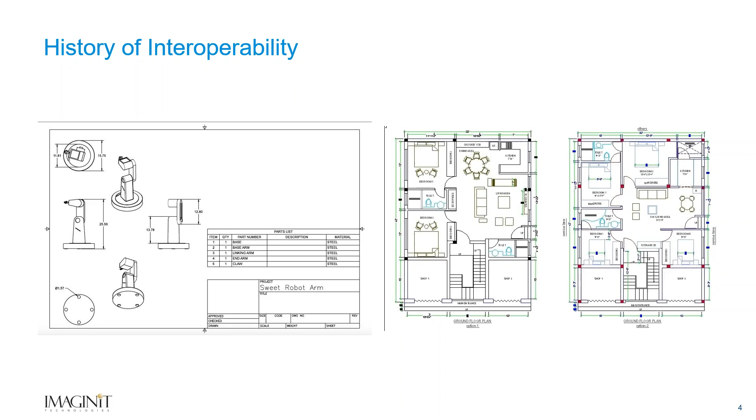So on my end, we're looking at the left side there where we've got Autodesk Inventor. That's really the tool we're talking about today when it comes to this, where we can do a true digital twin of a mechanical device, down to actuators, down to range of motion, everything about it. This could include all auxiliary tooling for that - it could include whether it's a mold or a die cast component that we want to put in there. We need to capture that, whatever it may be. So Inventor captures it right down to a very fine level - we're talking thousandths, down to several thousandths in precision. We're talking every little screw, nut, bolt, everything that goes in there, and we can capture it, create bills of material, create documentation for that.

The other side, looking over at the right, is where Brian comes in. It's a little different on that side, right Brian? Yeah, definitely. When you take a look at a Revit-based environment, and that's what you're looking at right there - go ahead and let's leave it on Caleb's screen for just a minute - when we take a look at the Revit-based environment of it, Revit is really looking at parametric design. What is your design intent? Although in manufacturing we can see all the actuators, all the bolts, that's really not what's important to us. The range of motion is important, the area of operations, the area required for maintenance of that piece of equipment.

Other things that are also important is a graphic representation of what that product is and any services we need to provide to it. Is there a structural load requirement for it? Is there power? Is there data? Do we have to provide coolant for it? Those types of things become important in a Revit parametric environment.

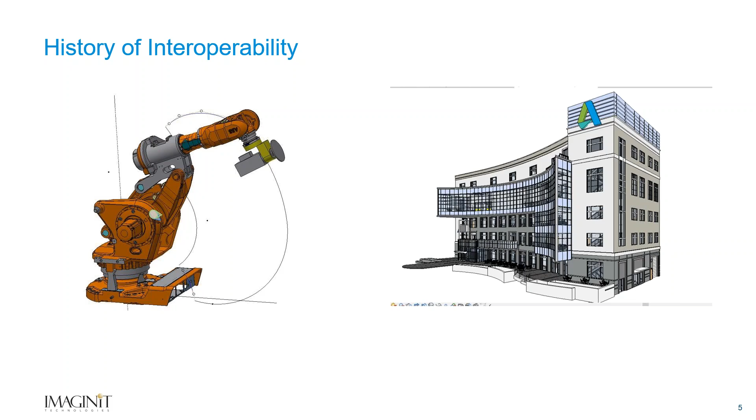And again, in the old days it was easy. We use AutoCAD. Well, then what happened is once they moved to these specialized kernels, for a while there, this was really difficult.

Autodesk has kind of begun to accelerate this, and we've seen this back in Inventor 2016. I could, for example, if I wanted to work in Brian's building to begin a layout, I could bring in a Revit file, import it and begin working to it. Then I could export to a Revit family. And that was really all we could do for a while - we could either import the file and then export it.

Then they added AnyCAD, which had been around. It came out in 2020. And with 2021, it was AnyCAD for Revit, where I could use the Revit file linked to my file. I didn't have to import it anymore like I did before. That meant if the Revit file changed, my file changed. So I still had to have the Revit file locally, but it was possible.

2022, I could export Inventor files as a Revit file. So we'll see that in a little bit where I go through and export it out as a Revit file. So it comes in, I work on it, and then I can send it back out. And in 2023...

2023 is probably the beginning of the new way of doing things. That's when Autodesk really first introduced the capability to generate these families - Revit calls them families, AutoCAD calls them blocks - being able to transfer data and information back and forth from Inventor to Revit type platform.

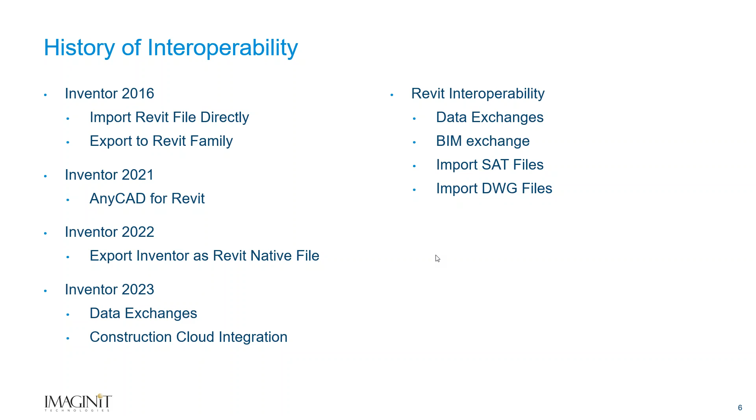Yep, and we'll see some of that, like I said, in just a moment here, where we transfer this data back and forth in a variety of ways. Before we start talking a lot about just transferring that data, there's a couple things I want to make sure we're covering here. One is this one.

It's the idea of a BIM catalog workflow. We are going to generate components inside of Inventor, and we can push them over to Revit. But a lot of times with a catalog, it's a little different. Revit uses, we mentioned families a couple of times. I'll have some examples here. But Brian, could you walk through this idea of this workflow? I know this doesn't even need to have Inventor. Inventor could play a part, but it does not have to play a part for a catalog workflow.

To me, a catalog workflow is when, as an architect, I can go to your product website and see a catalog of parts and pieces that are available with different sizes and different options. That type of workflow lends itself to family creation, being able to provide families out there so that designers can take that information and design within the envelope of the constraints of your product line. I'm not going to go outside of the options of what you're able to manufacture or how that product was intended to be used. A lot of the times I'll use a window as an example.

We have certain widths, certain heights, certain depths, certain amount of square footage of light that they provide, of glass requirements. All of that can be natively built into a family. A lot of you use Inventor, you have that information in your Inventor database. So we can export that out as a family, a separate standalone family that can be downloaded and shared with the designers.

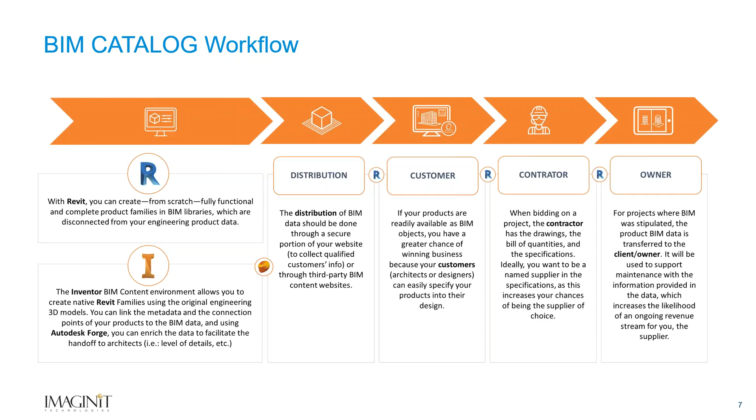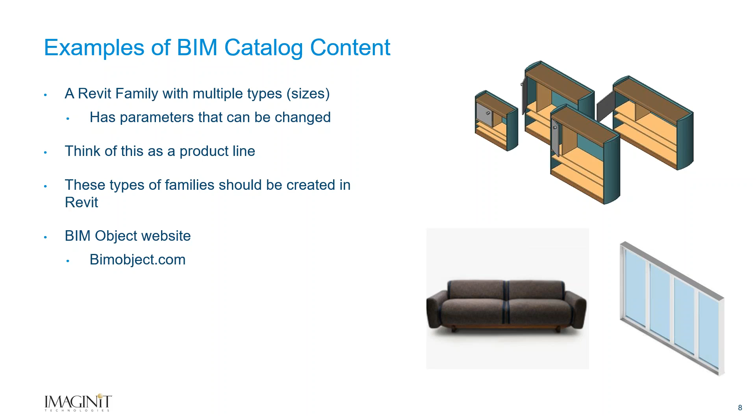Brian mentioned the idea of a window. To me, when I look at BIM catalog content, we talk about a Revit family, it has multiple types, multiple sizes. There's parameters that can be changed. So it's a product line, length, width, height. I think of things like that all the time. We come up with here's this version of it, a 17 by 24, a 17 by 29, a 17 by 36, all of these different ideas.

Some of this geometry could come from Inventor, but I know there's a company that we're working with very recently where we're going to do the design of the components entirely inside of Revit, because of some of the software that's in play. We looked at it and said, guys, it makes more sense for us to draw this up in Revit than it does over here. So this is one thing that could be done, this idea of the catalog.

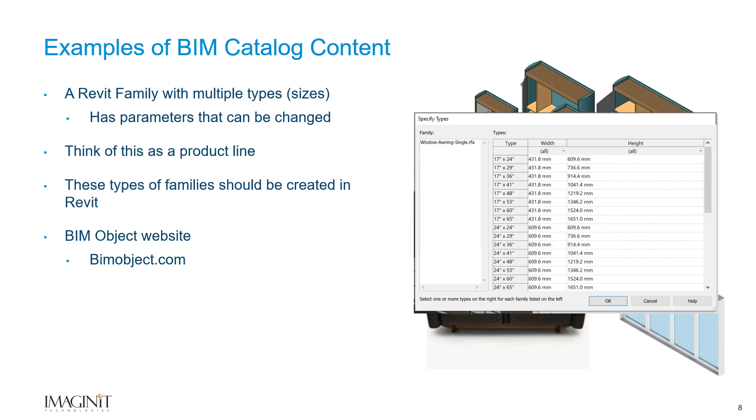The thing that we're going to really address today is a little different. It's the idea of building product manufacturing, and this is a more complicated workflow. So we've got both Revit involved, we've got Inventor involved, and the idea being we want to be able to reference the Revit file and build off of it. In the instance I'm going to be using, I've got some decorative metal cladding that's going to go on the side of a building.

And I need to know, how much space do I need to cover? Do I need to adjust this to work around any openings that they might have? I've got standard 6x8 cladding. Yep, we've got this, this can go out. But do I need to make a new one to fit in with what's going on here? Do I need to adjust my connection points? The only way I can get that information is by looking at the Revit model that we have there.

So we're going to use a series of tools for this. And I would say it's very common to use this series of tools when you're in a collaborative process. You develop and manufacture one-off situations that fall within the architect's design criteria, and you need to be working well within that envelope and be apprised of any changes that might happen throughout the different phases of the project.

And I'll say that collaborative process could happen between companies. In some instances, we've seen it happen within companies where one part of the company does a large layout design of something, and the other side has to manufacture the components that fit that layout. So again, it's a collaborative effort, sharing this information back and forth between each other. Some examples of this are typically engineered-to-order components.

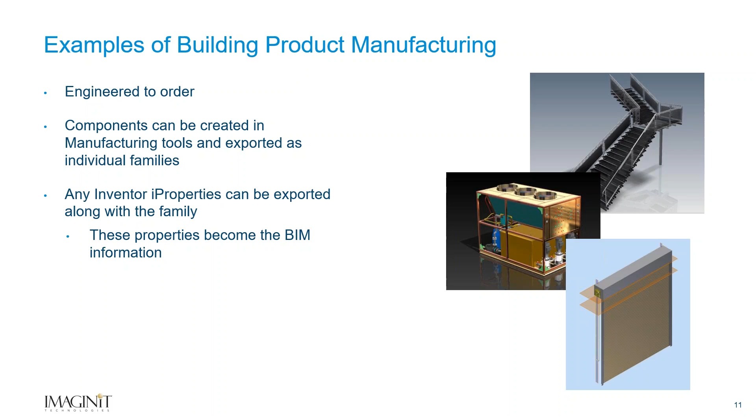We mentioned the idea of design and communication and how these come together. A couple different things we'll see - I'll be using the idea of data exchange. Brian's created one for me already. We did some of the cooking show things where some of this was already pre-baked in the background, and then we'll pull that forward so we can use that. We'll also go through and do some of these pieces live - we'll see a couple things live, some of it's done in the background.

One thing we debated is how deep do we want to go - Autodesk Vault can be part of this workflow as well, where Vault does some of the syncing for us. There's a range of ways this can be implemented, and that's one very fun challenge we run into.

Someone says, we want to do this. We then have to say, great, what does that mean for you? How do we integrate this, how does this go through? So we looked at this as, let's hit the high points. We'll leave some of these nuances off, but it is definitely possible to use Vault through that.

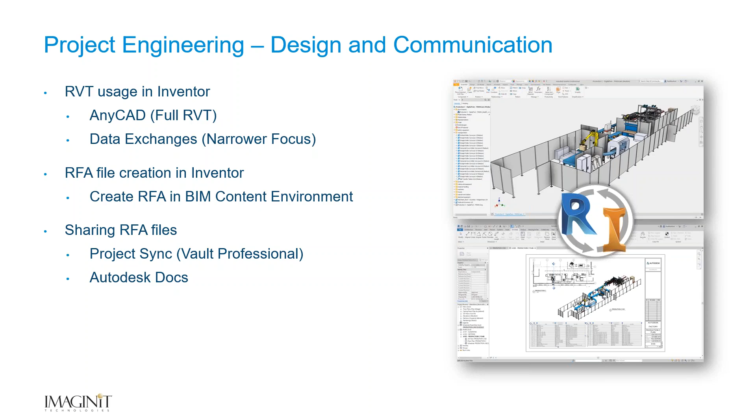What I want to do is follow this idea: taking the exchange, pulling that exchange information in, building off of it, and then sending that information back so it can be consumed in Revit. I'm going to go first and pull in Brian's data exchange, work with some information off of it, create some components, and send that back to him so he can import that into Revit and we can see it on the other end.

We're going to do it two different ways - as a family and as a full set. We're going to take an entire Inventor file and send it out as a Revit project, an RVT file.

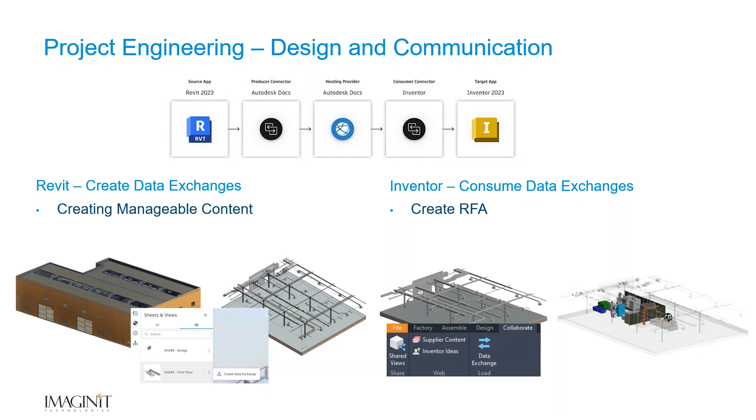I'm going to jump in here and take a look at my portion, and go grab my Inventor file to do this. This is the portion I brought in here. As we're taking a look at it and bringing it in, I just want to show this - it's really amazing that it's built in, right in as part of Inventor.

We have what we call data exchanges, and with the data exchanges, this is something Brian has set up on his end. Brian, as I pull this up, can you talk a little bit about - you've got a large building, you break it down to different pieces - just explain.

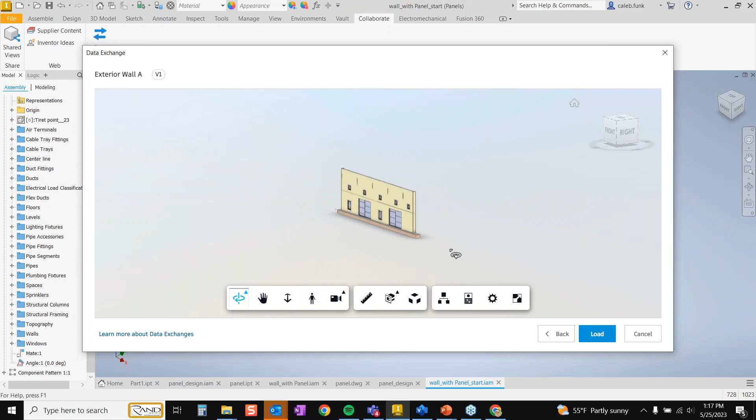Yeah, I've created a very large building with multiple views, multiple sheets, multiple pages associated with it. It exists in the construction cloud, so I've published an updated version. I can then go into a specific view I want to give to Caleb and assign that out so that all he has to bring in is the information that's pertinent to him. He doesn't have to see everything else - it's just that one piece of information.

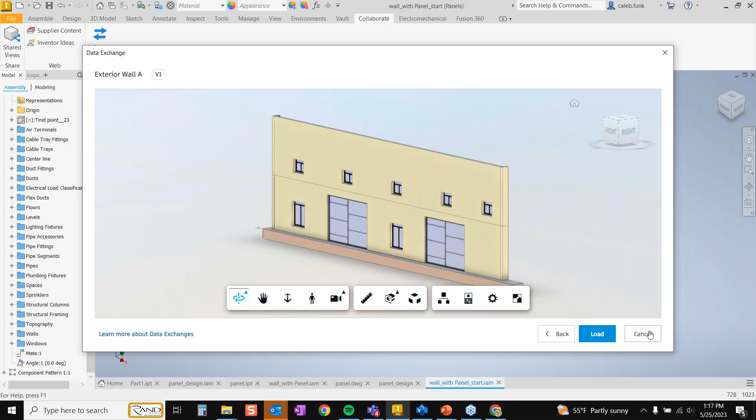This is a big move because now I don't get sent the entire Revit file, right? I get to work on just the portion that I need to work with. So this was a great step forward with how we could begin working on that.

Once this is in Inventor, this is an Inventor file - I can act on this as I would almost anything else. So I could, if I wanted to, come in here and begin creating right off of any one of these surfaces.

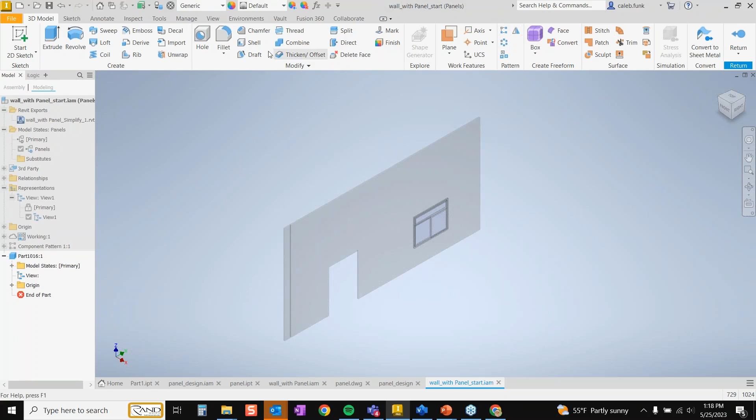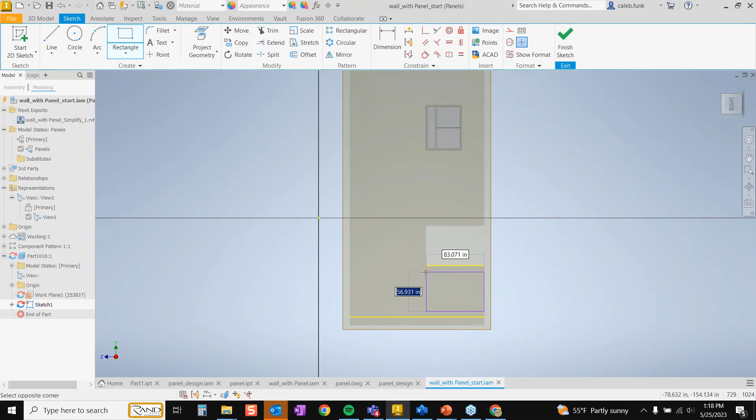I can project geometry off of these surfaces, there we go. Use all the standard tools I would think of for working with an Inventor file. So I'll come in here and say, well, I know I'm going to need this edge, not going to need that edge. We'll take that to start out, and I'll begin constructing my component. That would be one option I would have. I could build directly on top of that so I can use the framework of what's already there, any dimensions coming off of that, whatever it would be, I can work within that environment.

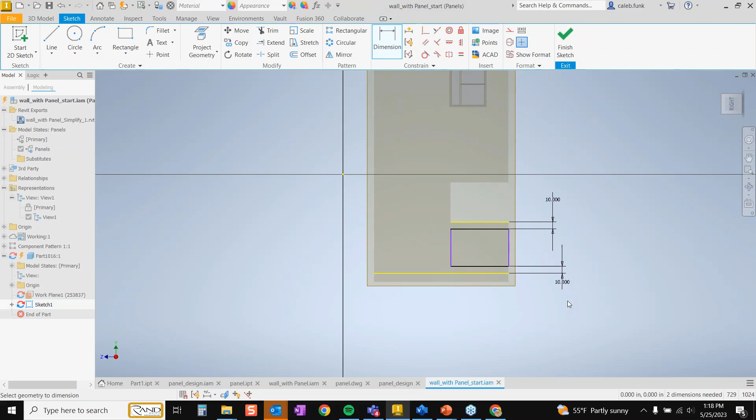Now you'll notice too, this is an adaptive, let's say 10 inches off of there. This is an adaptive sketch that I have. If Brian makes a change on his end, it updates on mine too, right? It comes right through and updates on this end. So I've got it over here, and I'll just give that some thickness.

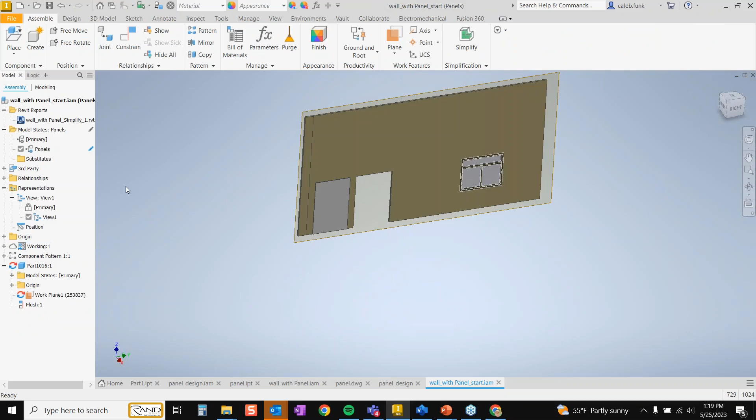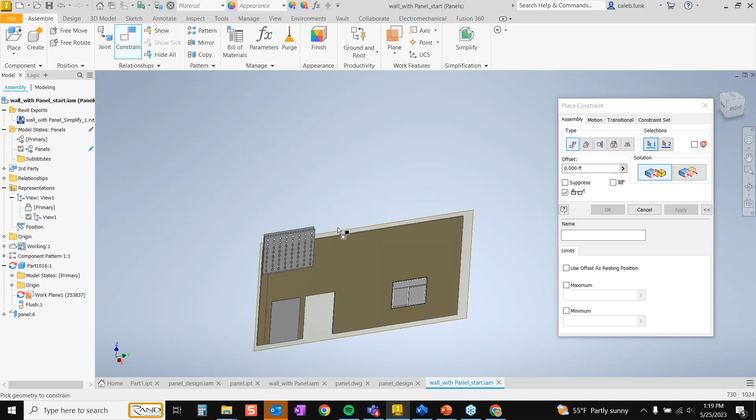This will be the beginning of some cladding that I'm creating as part of that. I'm going to actually jump out of this and use the other side of it, which is bringing components in. I could begin assembling off of this. Maybe I've already got something created that I want to bring in and assemble in place within here. Again, I can assemble right to his information. This is using all the standard Inventor tools that I would normally work with. I can begin putting that in, locking to it, linking it up.

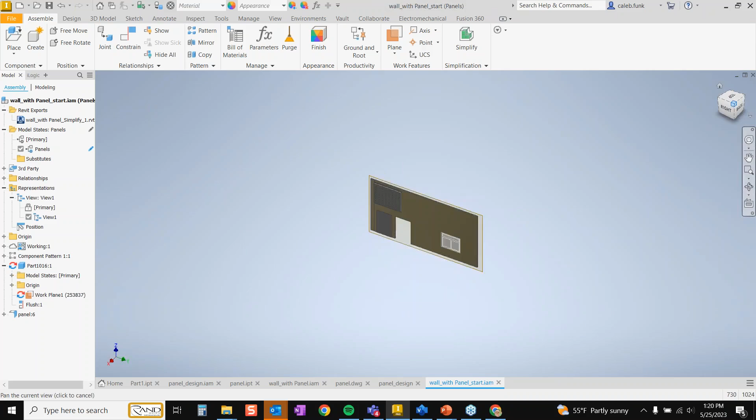It's going to work very much the same way as it would with any other piece of Inventor geometry. It just so happens that it's Revit geometry that we have as part of that. Okay? I think one of the amazing things here is that if I move the wall as a designer, Caleb's going to get notification that that link is out of date. He'll get an option to refresh the link, and it will maintain those rules and relationships he's put together. That's really amazing. So I can use this as my beginning points to lay out geometry, to link to this, to begin to set this up.

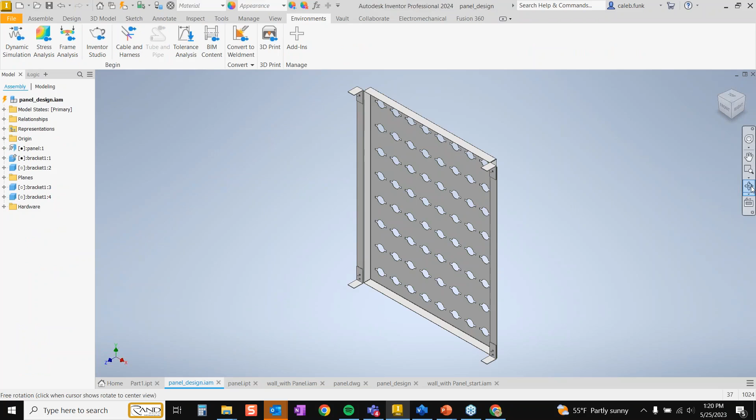And then I can go a little further once I get this, I'll just jump over here to where I want this to be. I can take that panel and flesh it out. So I've got all of the basic shape that I had, began laying it out, getting some sizing that I needed, open it up, put it into a separate assembly, begin to put in all my bolts, nuts, screws, all of the things that would make this component necessary that I would have.

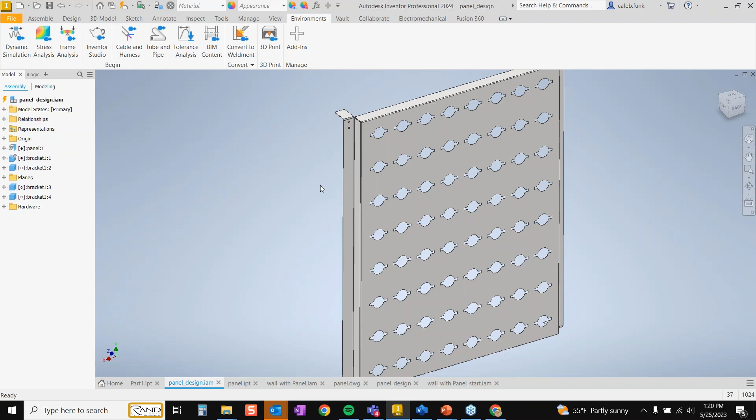Once I have all of this, there's a couple of ways that I can send this now to Brian, and we're going to play around with both of them here. I'm going to show you from my end. I'll take the panel, and I have an environment I can go to, just called BIM content. And once I come into here, there's a couple things I'm going to set up first, and then I can just export this as a Revit family, one of those Revit families we were talking about just a moment ago.

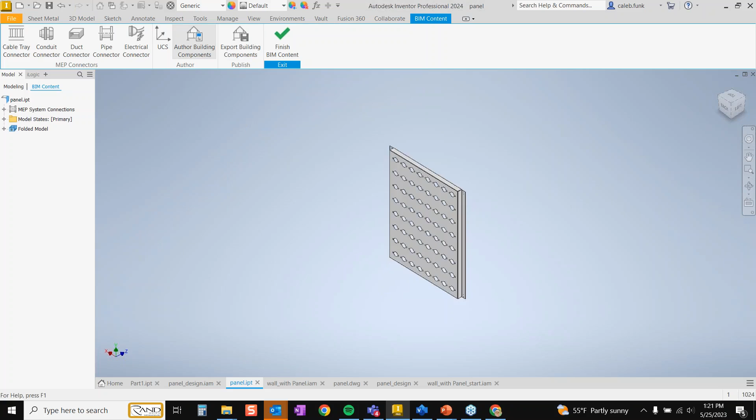So I'll come in here and begin, I'll say I want to author these components, and I could determine my insertion point. And there's some things, there's a little nuances that are different from Revit to Inventor about how we want to put these things in, but I set that up. Some of the key pieces that I have here.

One of them is this idea called OmniClass, and this was all new to me. So Brian, can you explain a little bit what this is?

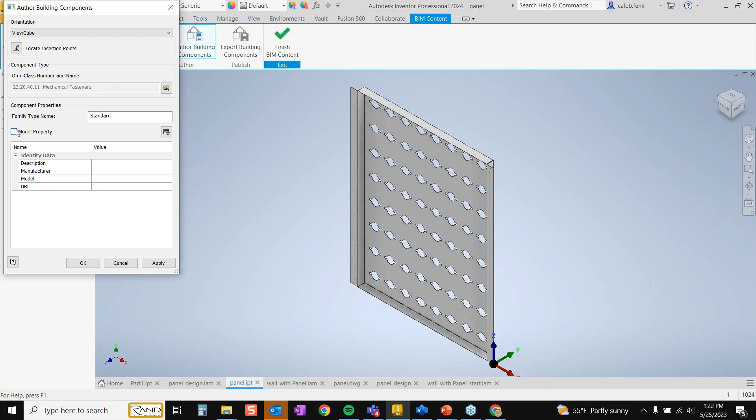So a lot of your architectural firms and owners will be familiar with the OmniClass classification. It really breaks things down by CSI divisions of what every single product is. And it's going to allow us to directly tie your product to a specification inside of there. Typically manufacturers, this will come from your marketing team or engineering team who will know where your classification is. Equally, and sometimes more important than that, is going to be the manufacturer properties or the modeling properties and metadata. Being able to add your specific information that really sets you apart from your competition.

That's why you want to be spec'd in a project, being able to automatically bring that data across. So with this, we have all of the iProperties. We can take these iProperties, pull this information, and send it across as it suddenly becomes BIM information.

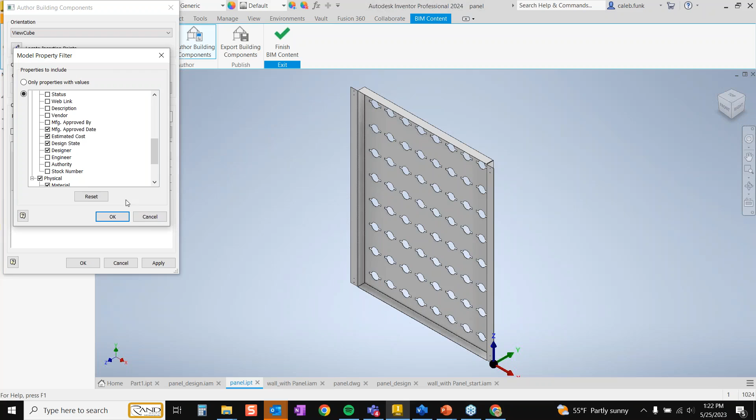That information can go into schedules, be viewed within the Revit model, all of that goes along and is built into it. Typically I would set that up first, then just save this as a Revit family. In my case, I'm going to drop it into a shared project that we have, and we'll switch over to Brian so he can take a look at bringing that file in.

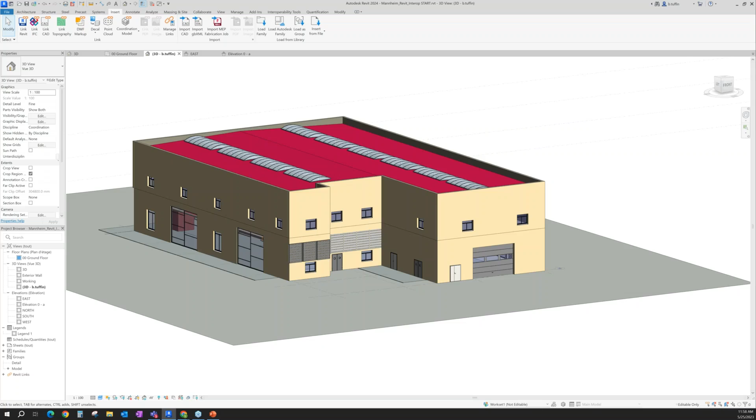Excellent, thanks Caleb. I'm going to share my screen here. You should be seeing my Revit screen now. I have a couple of different options here. I'm inside of my Autodesk Construction Cloud, and I went out to Caleb's manufacturing folder that I gave him permissions to. Keep in mind, you don't have to have access to the architect's file. I notice I've got a panel.ipt exchange that's an RFA, a Revit family.

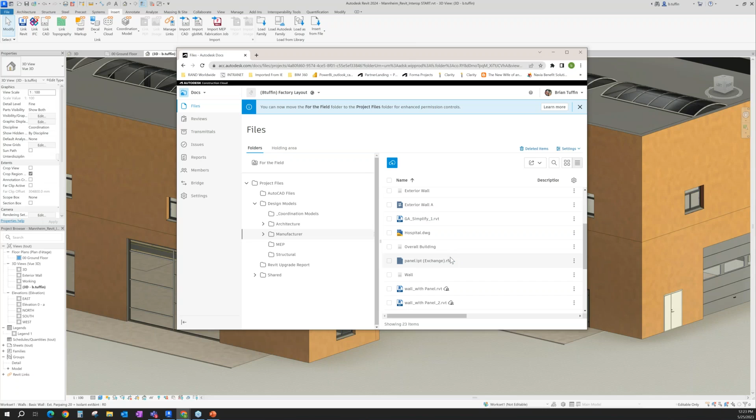This makes it very simple for me to start using. So in Revit, I can come out to my components and choose to load a family. From here, I'll go out and find that family, select it, and open it up. I happen to have already loaded it here. You can see it in my selection set, and you'll notice I've already got it attached to my cursor.

Now, one thing about doing it this way, it's a one instance basis, so I'm placing one at a time. From here, I would just come in and snap wherever I wanted that product to be placed. It's a one-time snap process. I've got mine rendering, so some rendering materials are coming through with it. You'll also notice that I can copy these and place multiple throughout.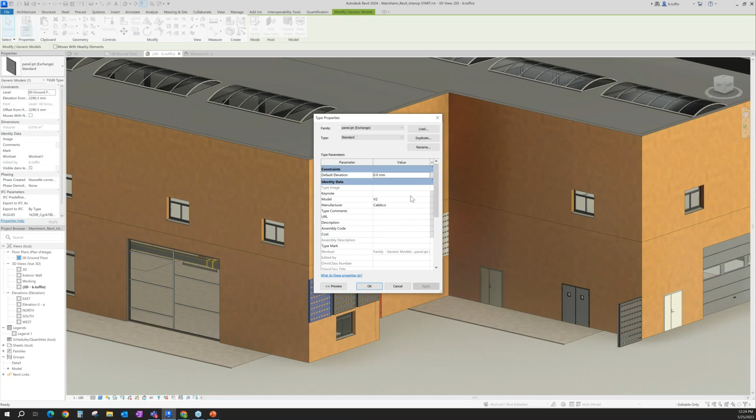I do want to point out that metadata is encapsulated inside of it, and all of this information can be scheduled. So one of them was phase of the project, whether it's signed off, conceptual design, iteration 1, 2, 3 - all of that can be done.

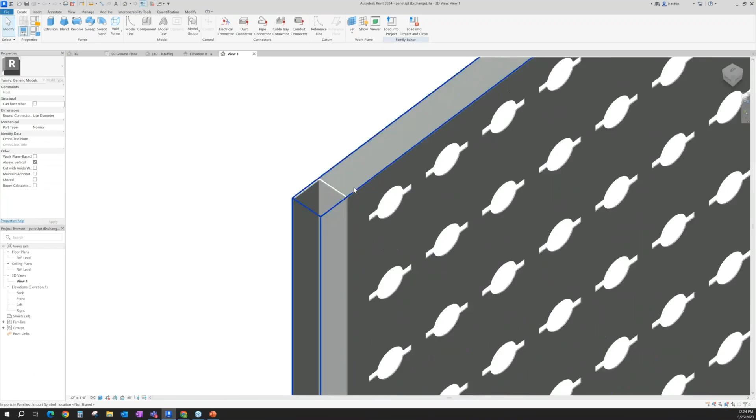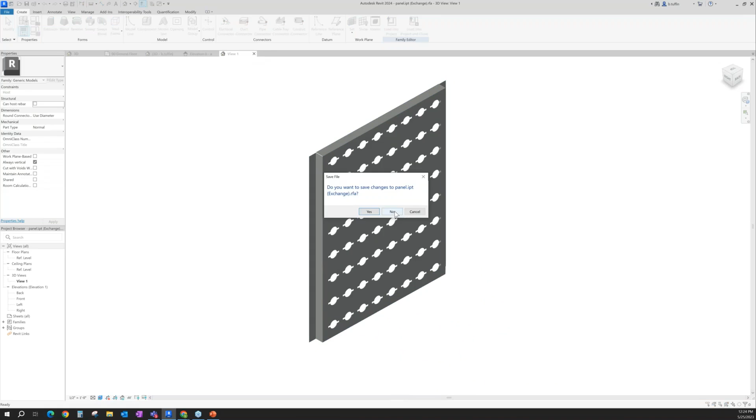Now, when we're looking at individual families, there's a couple things you want to take a look at. I'm opening mine into what I call my family editor. The family editor is starting to show me that Caleb's got a lot going on here - look at the bend radiuses of the metal, there were some holes here that he went ahead and removed, and we're seeing the perforations inside of here. But we really want to pay attention to the level of detail and how much information is being brought in as a family so that the architect can easily work within that envelope.

Right now, we're pretty good on this one. I'm pretty happy with this one. I'm only going to have 3 or 4 of them. If I was cladding the entire building, I might want to change that to show a little bit less information. Yeah, we could go to a much simpler representation of that for sure, but exactly what we have here is where we'd want it, because remember, the space it takes up is what's important - the design is what's important to me, not how it's manufactured at this point in time.

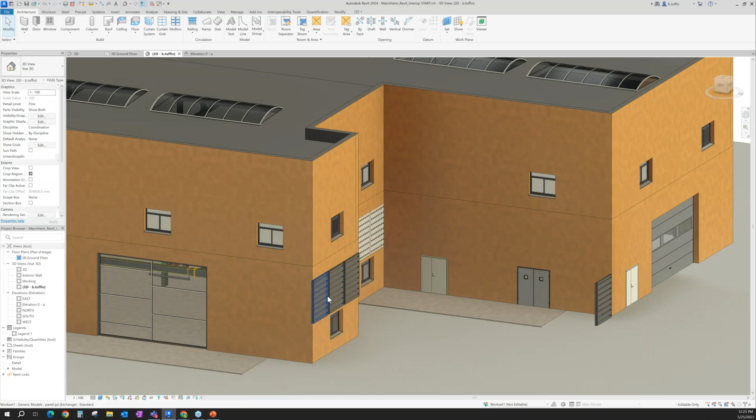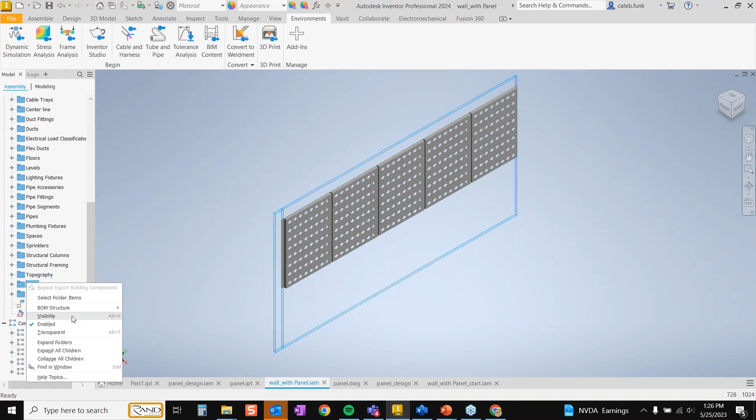Caleb, I'll let you take it. Yeah, so when we take a look back here with what I have, I'm going to go a little different. In this case, I created my single panel and sent it on out. Based off of information that Brian had sent me and that we're working with collaboratively here, I've taken that information and sent one out. I'm going to do it just a little differently, where I come in - in this case I've got a wall I'm going to turn off, but I'll turn it back on. This is the same thing we saw earlier, where I've got my wall, but I went ahead and put in...

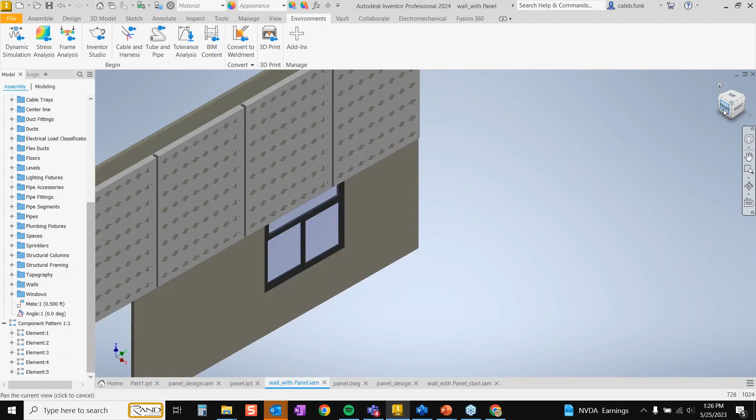I have now, instead of handing one off to Brian and letting him determine where it goes on the building, I said, no, I'm taking your information and setting up where they need to go. This is how these would fall in order, and this is where they would fit together, so we can have a clear understanding of how that works, how the clearances and spaces I need, whatever it would be.

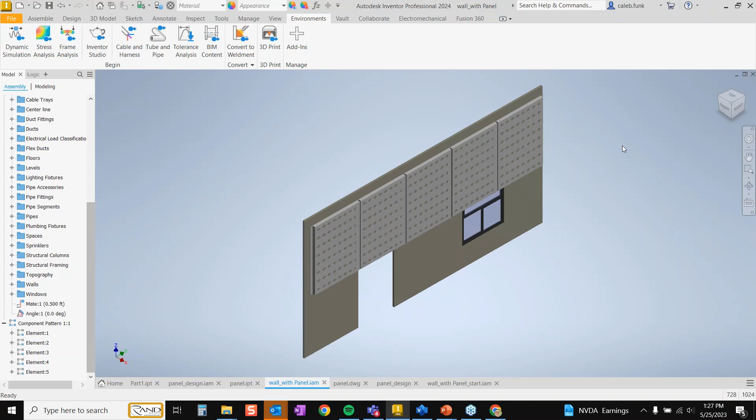So I've built this series up now. The great thing is I don't have to send them one at a time. There are sometimes instances for that, but in my case, I'm going to send this as one group, which then can be imported into his larger model. And the great thing is this is really simple - it's just export. I can take and export that out as a Revit file directly for him.

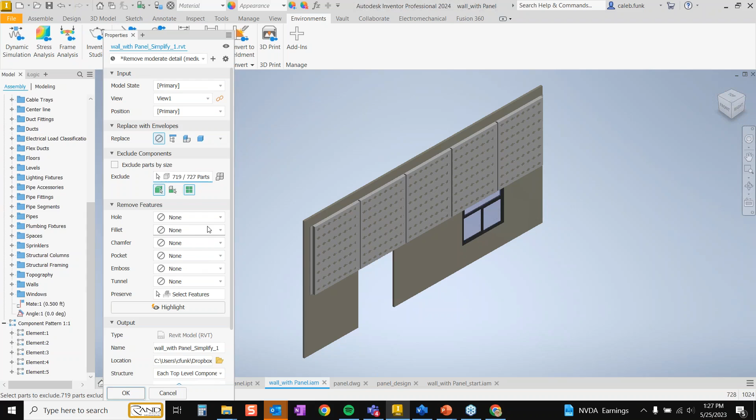When I do this, Brian mentioned, man, there's a lot of information in here - I can see all of this and all these pieces. I can now come in, go through with my view turned off, and with my information where I want it, I can determine: do I want to remove holes? Do I want to remove fillets, chamfers, pockets, tunnels? What do I want to remove from this model, so I can clean up all of this information that's there, making it a smaller model overall.

I determine where I want it to go - what does this look like, where's it at - and then I can just send that out and save this for him. So in this case, I can create this Revit project that will be appended on his side. When we take a look at Brian's screen, he'll show how that can come in and where he can bring it in.

Yes, definitely. So I'll go ahead and open up and show you what that looks like. So you should be seeing my project here.

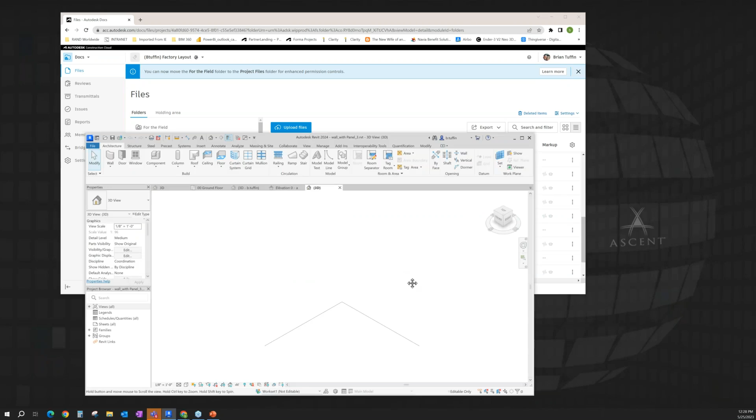Taking a look at the construction cloud, Autodesk, Caleb's already sent out - this is the third iteration of the panels inside of the cloud. I can go ahead and open that directly inside of Revit here. Go ahead and maximize my screen, and you'll notice he's placed these 5 panels inside for me, so I can start to see what's happening.

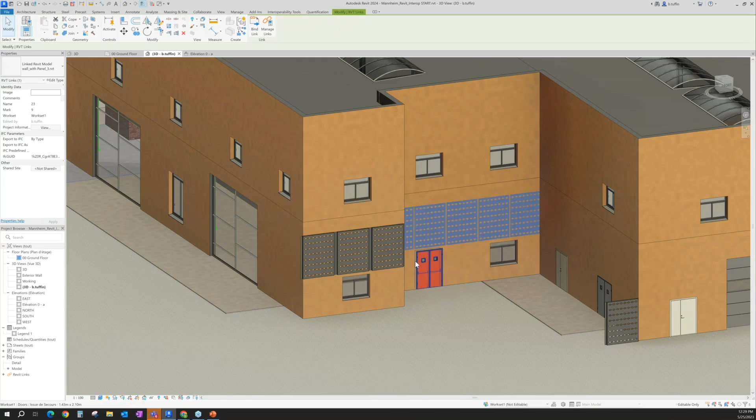There might be 300 panels laying out the entire exterior cladding of this building. Now I can see it, and it has a common insertion point. So really, all I have to do back in Revit is go through and insert, and I can link a Revit file. I've already linked that file in, so I'll just take a look at Manage Links, and you can tell right now it's coming from my cloud environment.

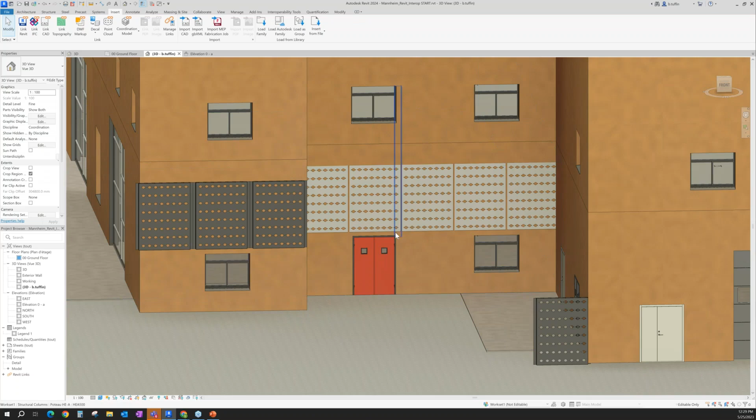It's treated as a linked Revit model with a different level of detail that Caleb determined early on, based off the level of detail of his shrink wrapping of how he brought it in. One benefit for me is the file size won't have as much impact as each individual family would. I don't have to place them around, but I get the ability to take a look at this and realize, oh gosh, Caleb, what were you thinking here? I want the joints to line up perfectly with the doors and windows - I want a smaller panel, larger panel, probably two equal smaller panels, and maybe a larger panel here.

I can either convey this with some geometry or lines to help him understand where he wants it, or I could even go back to my construction cloud, take a look at my Revit project, open it up inside of the construction cloud, and mark it up for what my requirements are.

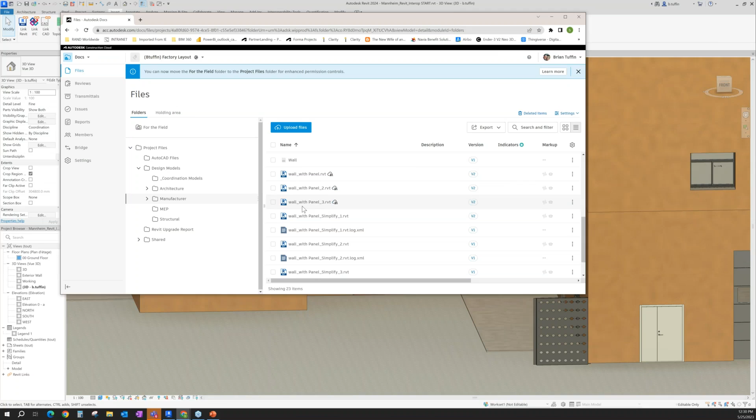Everything that we've done to this point is very much out of the box. These are tools that are available to you today as part of Inventor, nothing fancy, nothing special, just tools available within Inventor that we can use. You can turn around and use them right now. Same thing is true of Revit, which can pull that information in without any additional configuration or setup.

What we want to do is talk about a third alternative, right? Not just Revit families, not just having the entire Revit project, but using a transfer engine. So just to be clear what I'm talking about, this is a software bridge, custom software that's written to work with Revit and Inventor.

This is something that IMAGINiT has done a fair amount of lately. This topic has come up again and again. Brian and I were just saying how many of these types of presentations we've done, and the number of discussions we've had, it's pretty substantial. This is a common topic: how do I leverage Revit information, or how do I send my information to Revit?

What we're seeing is some companies opting for IMAGINiT to create this custom software that allows for different things. For example, we can pass geometry, not CAD files. Geometry would be just give me the points, some planes I can begin working with. I don't need the Revit model, just the points so I can begin building off of that.

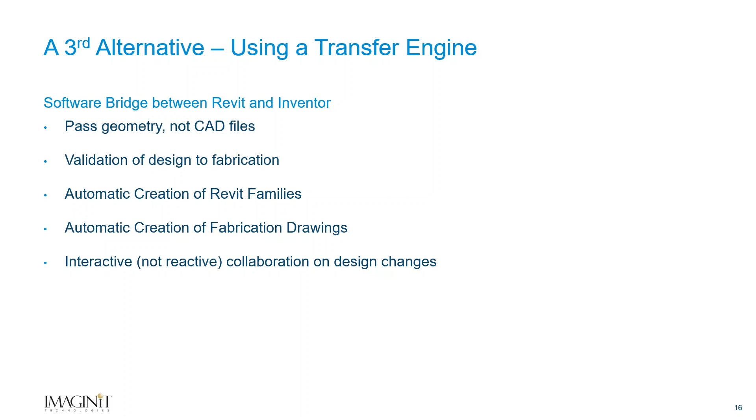What's interesting is a lot of this is happening within a single company, where there's a company who maybe receives Revit files from an architect or creates their own as a layout, but then has to manufacture to that. The idea of a transfer engine, which is just automation, allows this information to work.

And here's some of the things that we've done with it. So Brian, from your end, looking at the Revit side and what's available over there, what's some of the things you've seen?

A lot of the times I'm working with companies that are dealing with curtain walls, custom interior wall cladding components, exterior cladding components, or maybe even some very complex ceiling type components or stairs, allowing me to design a basic concept for the stair and transfer to the manufacturer the key code requirements or key design requirement areas, then allowing them to go beyond that and fully develop it in Inventor, transporting that data directly back to me.

On the Inventor side, it's the idea of receiving that information, but then going a little further to automatically create some things. For instance, production drawings, I create these panels, they're all laid out the same, they need to go in this orientation. We need a DXF so we can send it to the laser, and we need a detailed drawing showing up like this.

And they're all pretty much the same, so we can automate. We can even understand what wall this skid of panels goes on, where it goes in the construction process, how you're delivering it. That's a key one to me.

So I'm just going to show as a concept some of the ideas that we could work with. I'm going to jump back here to my Inventor. This is something where I was pulling in actual Revit geometry and building off of that.

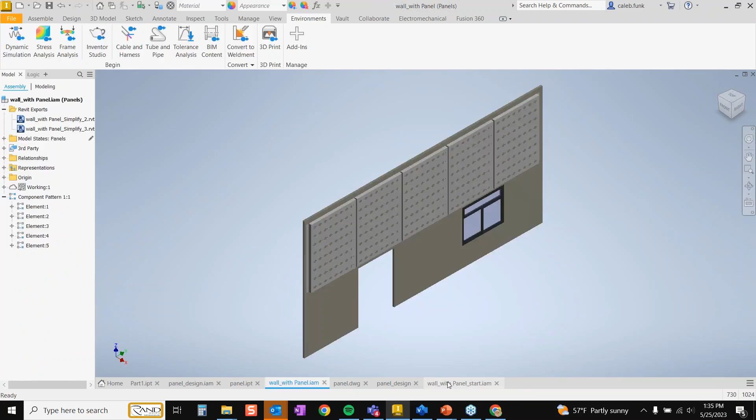But like I said, it's very possible that I may not want to go quite that far with it. I may just need to pull in some different pieces of geometry, and of course I've lost that piece. I can pull in different planes as part of this, so we have some of that information in there, and we don't have to have all of this extended information as part of that. It could just be a series of planes.

A big thing we can do once we transfer that information across is begin to work with it on this end, where I can automate the different pieces I have. I might say, alright, let's build this up. I've got a specific length, a specific width, a specific thickness, and choose different mounting kit options of how I'm going to work with that. I'll say, yep, I don't need a BOM off of this one, and I don't need a Revit family, but go ahead and give me some detail drawings. Let's build off of that. And again, we're leveraging code in several different ways.

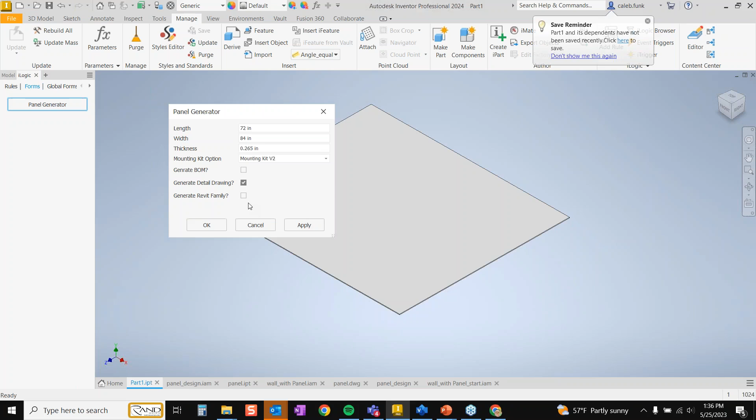It could be something as simple as a configurator, like what we're seeing here. It could be something more complex, such as leveraging Autodesk Forge, which effectively allows us to run things in the background to automatically generate things like my drawings. So it goes through, once I hit OK, it builds up the drawing, gives me the orientation I need, begins ballooning that out, and pulls out a bill of material as part of that.

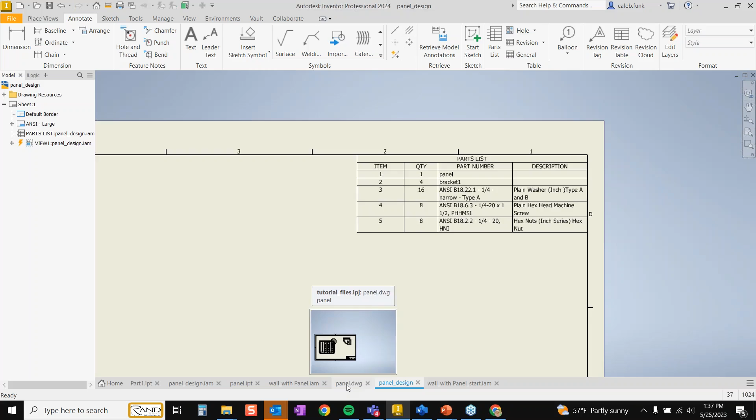Looking at a whole project, all the components that are there, depending what information we pass back and forth. So we've done things as simple as just passing geometry back and forth, and things as complex as going through and grabbing every opening that I have, giving me an analogous version in Inventor so we can build off of it and push it out. There's a lot of different ways we can leverage the same type of components and geometry to put this in.

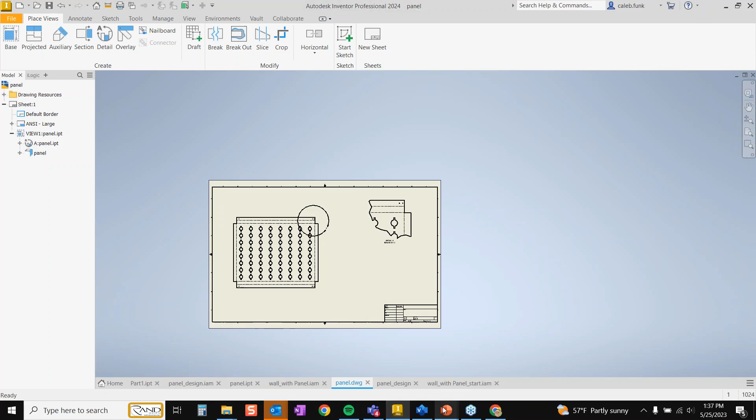Brian, do you have anything to add to that? It's kind of a difficult concept to get across because we haven't written the software yet. It's possible, we can do it, but I can't show it because it's not written.

Yeah, it boils down to being able to better convey the information back and forth across the two platforms. Inventor is amazing for manufacturing, for fabrication, for the high-end detail side of it. Revit, a lot of times I'm seeing people using for the design and the installation drawings. So maybe I want to be able to tag which part numbers are used where, in which area. We're fabricating it, putting the skids together, manufacturing it, shipping it, but we want to use Revit to tag and schedule what needs to show up when. That's another prime example of it.

Yeah, it's a great example of what we'd be looking at. So those concepts, those ideas, whether you're using the standard tools available within Revit and Inventor, or you're looking to extend those through automation, where we can read the geometry and automatically begin generating things within Inventor, all of that is definitely possible within the tool sets available to us today. That's the big broad overview we wanted to show.

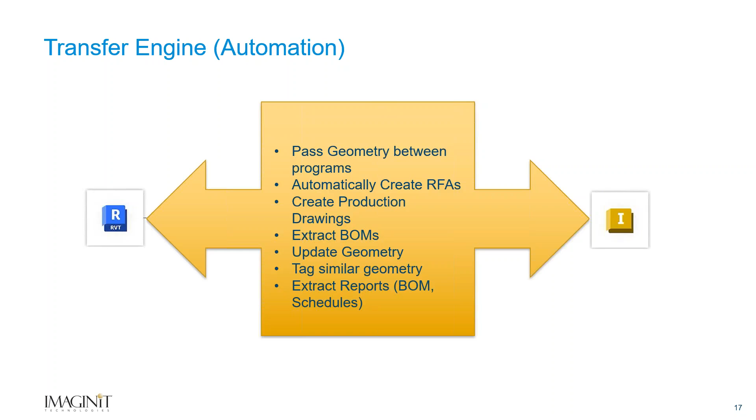I want to open it up to see if there are questions, because this always generates a lot of different discussion points, whether you're on the Revit side or the Inventor side. There's a lot of ideas being expressed here. So I just want to open it up to Lori.